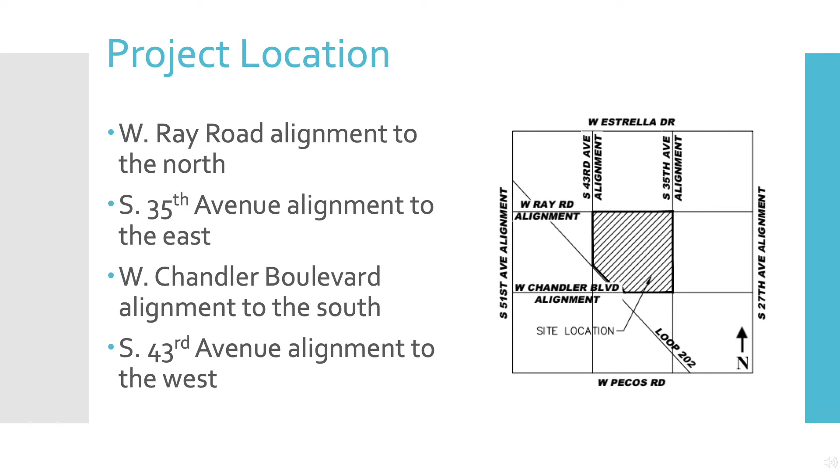This site has a current zoning of RE35, which is single-family residential, is part of the South Mountain Preserve, and has a natural drainage from the northeast to the southwest.

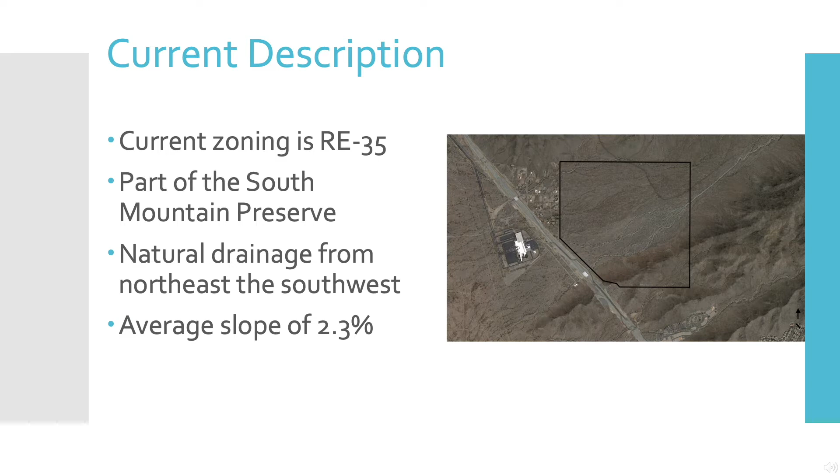Rise and Shine is proposing to include a police station on site, as the current one is 11 miles away. Additionally, the current fire station is 4.3 miles away. The nearest hospital is 4.5 miles away, the nearest elementary school is 4.3 miles away, and the nearest middle school is 8.8 miles away.

There are no high schools in the area, which is why Rise and Shine is proposing to include a high school in Parcel 1. The key feature for our site is the Rise and Shine Stadium that will seat 40,000 people and is located near the freeway for easy access.

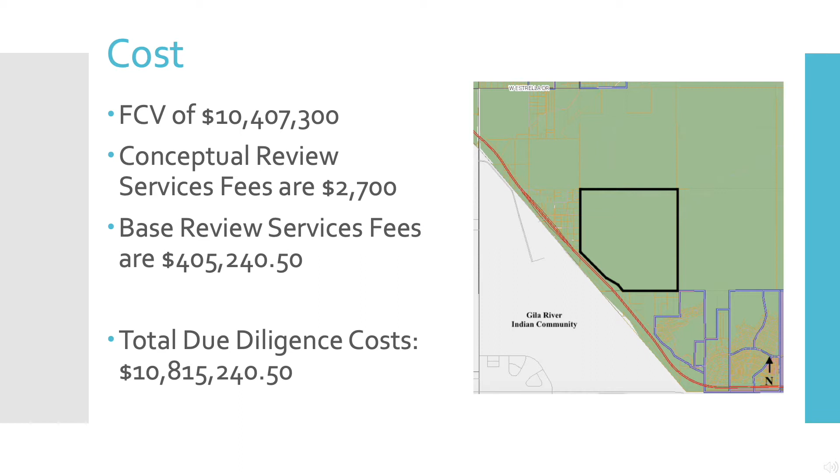This site will cost $10 million to purchase. It'll have conceptual review service fees of $2,700 and base review service fees of $405,000. The total due diligence cost will be almost $11 million.

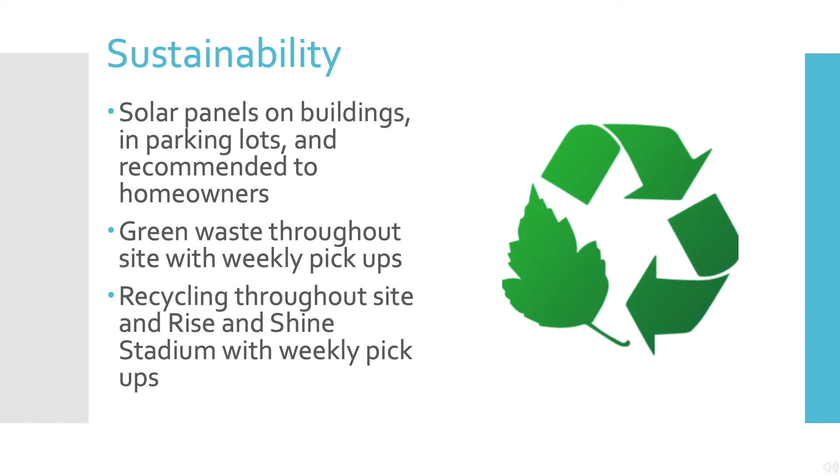We as Grand Engineering are recommending the use of solar panels, green waste, and recycling throughout the site wherever possible, and especially in the Rise and Shine Stadium. Rise and Shine will provide job opportunities, offer entertainment and shopping experiences, and be a place for residents to call home. It'll benefit communities through youth programs, community centers, community events, and funding of schools and emergency services.

To summarize the due diligence portion, the Rise and Shine community consists of 571 acres in the city of Phoenix, is surrounded by the South Mountain Preserve, has 9 different land uses with the Rise and Shine Stadium being the key feature, has a total cost of roughly $11 million, and will guarantee to offer a home, develop the economy, and maintain a safe community.

Hello everyone, my name is Andy Atondo and I will be presenting the traffic analysis done on the Rise and Shine site. The Rise and Shine site is 571 acres located off the South Mountain Freeway.

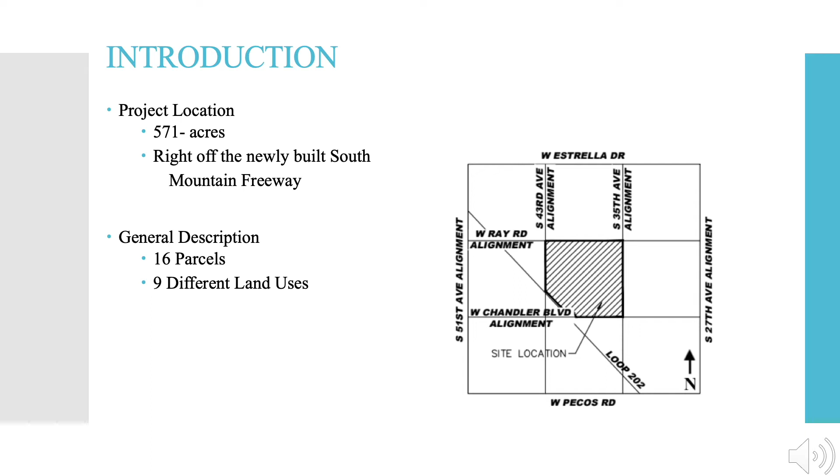There are 16 parcels with 9 different land uses. Currently, there is one exit that promotes access to the site, called the Vee Quiva Way. The land contains a road called San Juan Road and it does not have any classifications yet.

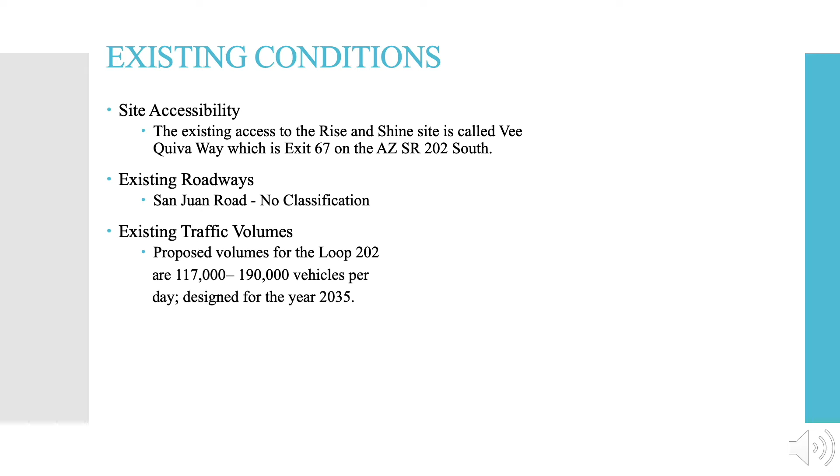The only traffic volumes available are the proposed volumes on the freeway for the year 2035. Here we have the proposed land use plan. On event days, the southwest corner will be highly congested due to the visitors of the Rise and Shine Stadium.

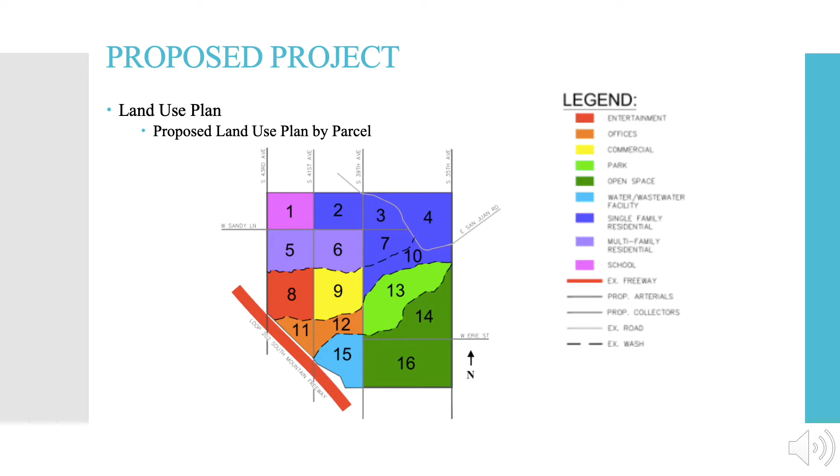The trip generation calculations were completed first. The rates came from the trip generation manual. The total amount of weekday trips generated were used for the next computations. The most trips generated came from parcels 9 and 12.

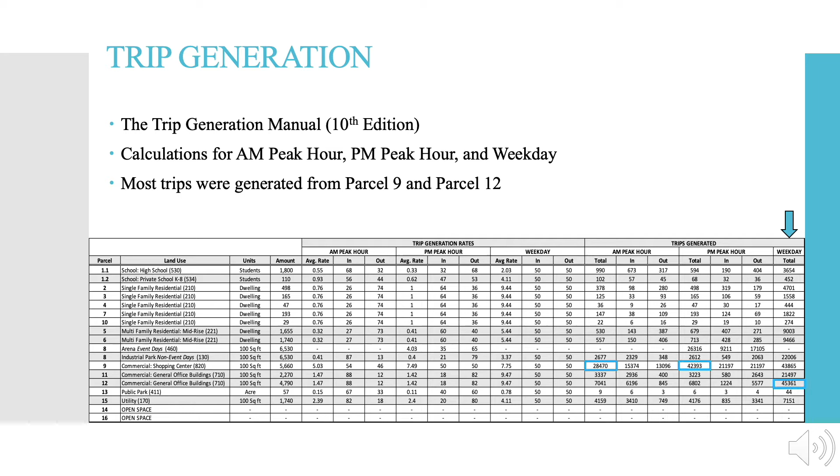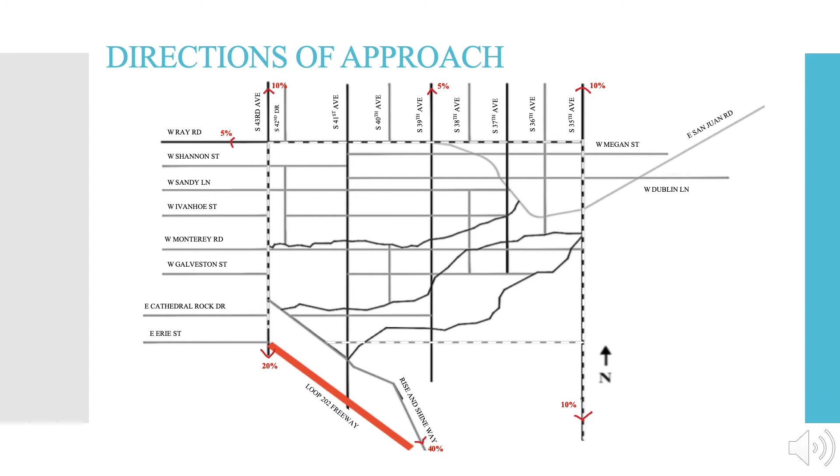Before starting the trip distribution and assignment calculations, the roads needed to be broken up into segments. A segment is a portion of a road. The names and colors to these segments match those that will be seen in the upcoming slide.

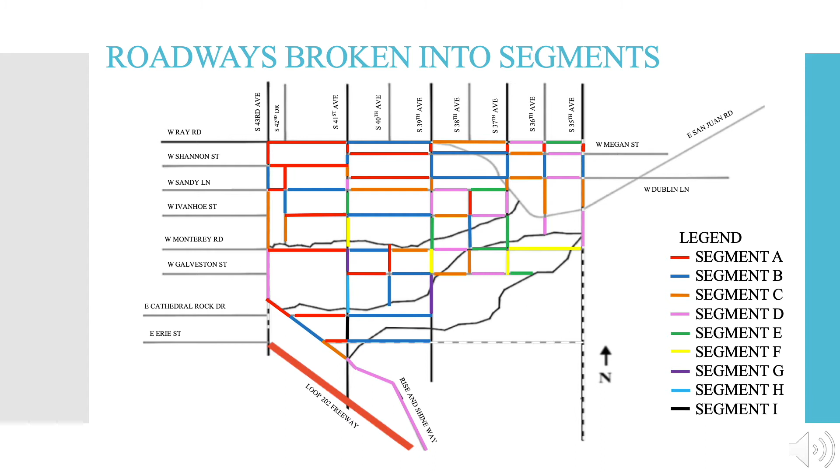After the segments were assigned, we began the trip distribution calculations. There was a percentage allocated to each segment that described how vehicles were predicted to travel through the parcels.

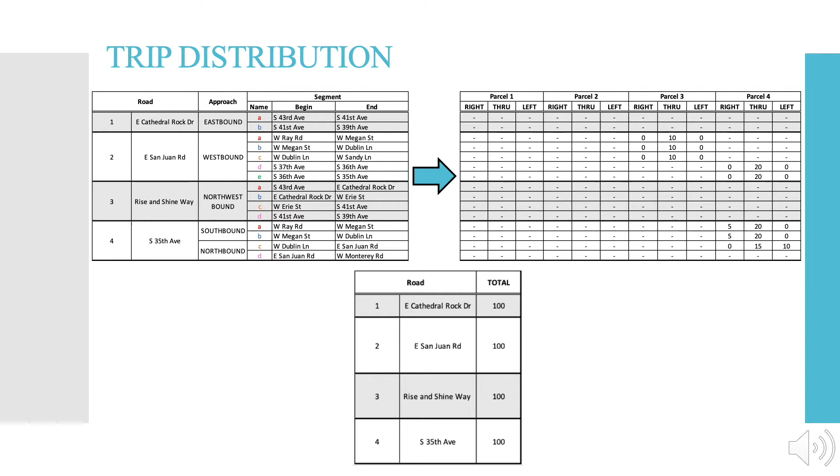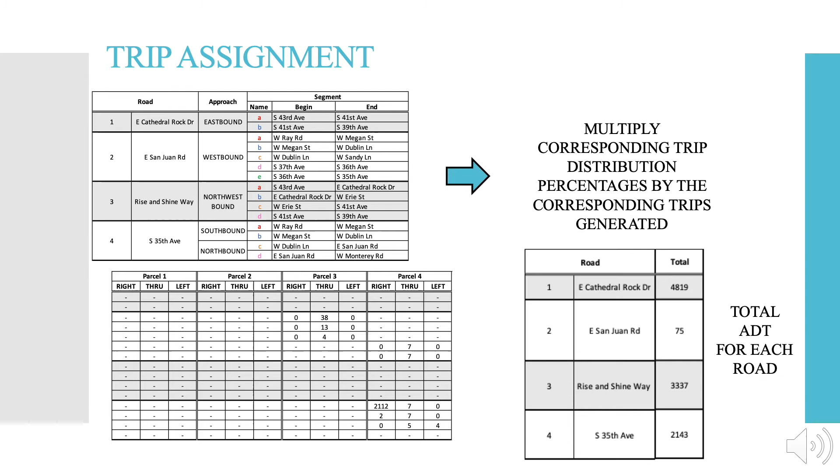Every total at the end of the road was equal to 100%. To get the correct number of trips assigned to each segment, we used the total trips generated and the percentages of the distribution. The total trips on one road was the average daily traffic used for that road.

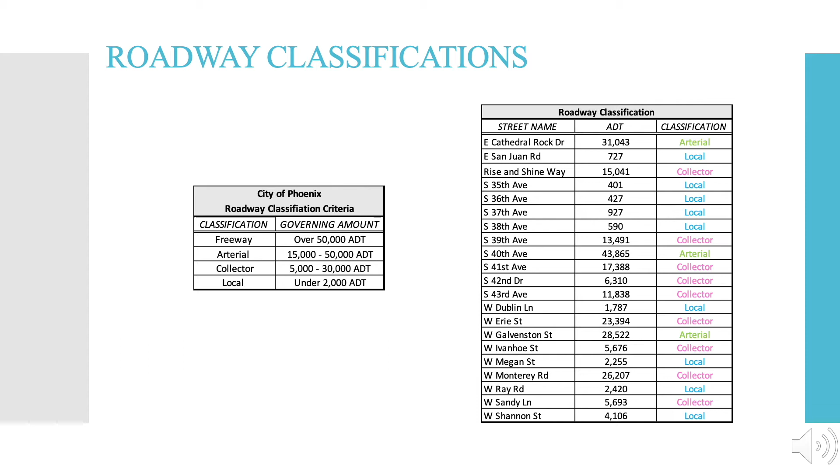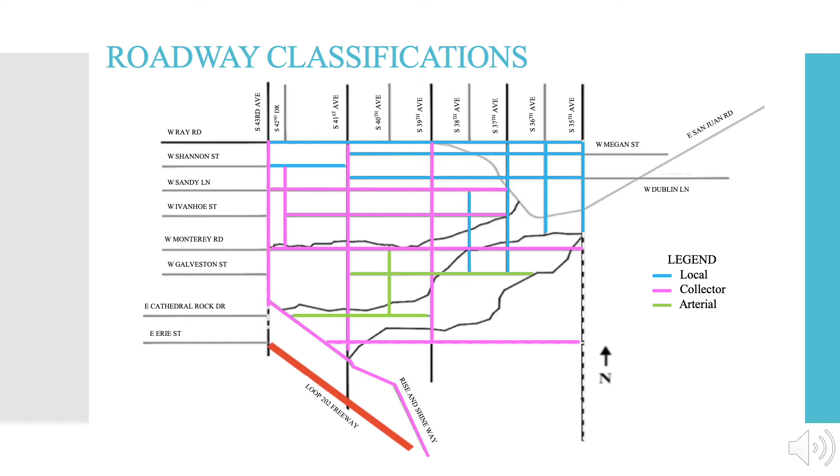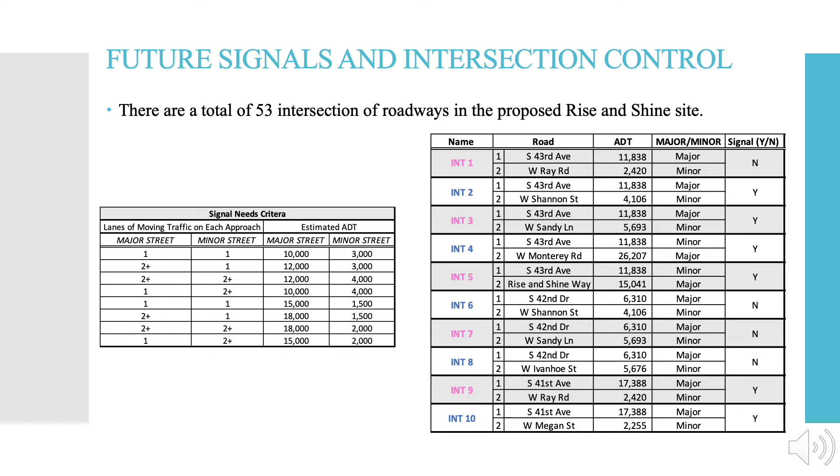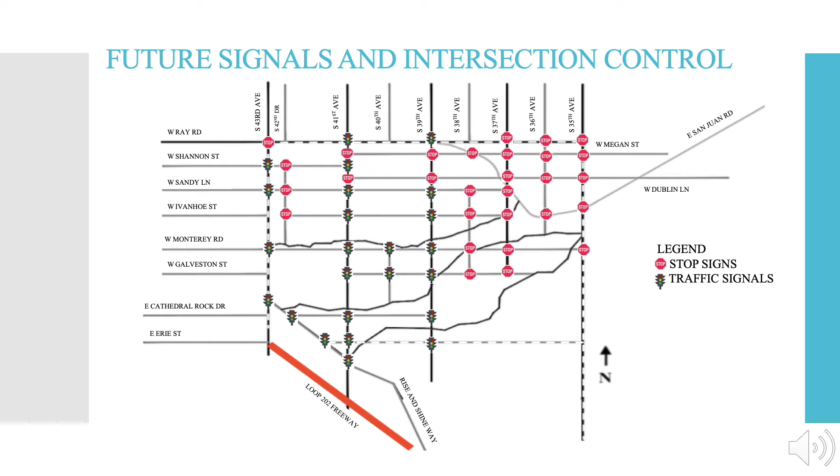There are a total of 53 intersections in the site. For each intersection, we needed to determine if a traffic signal was needed there. To do that, we used the signal needs criteria table presented here. Here's an image showing all the traffic signals needed for our intersections. Every intersection that did not need a traffic signal was issued a stop sign.

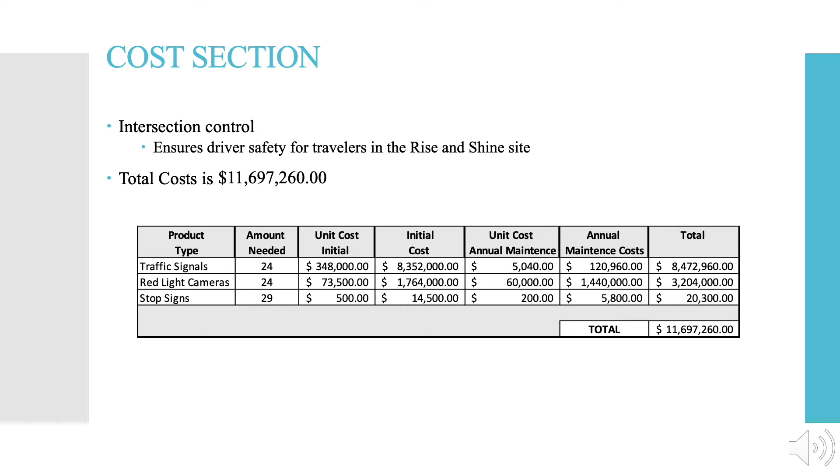The cost section for the traffic analysis included traffic signals, red light cameras, and stop signs. The total cost was $11,697,260. This cost included the initial implementation and annual maintenance of each system.

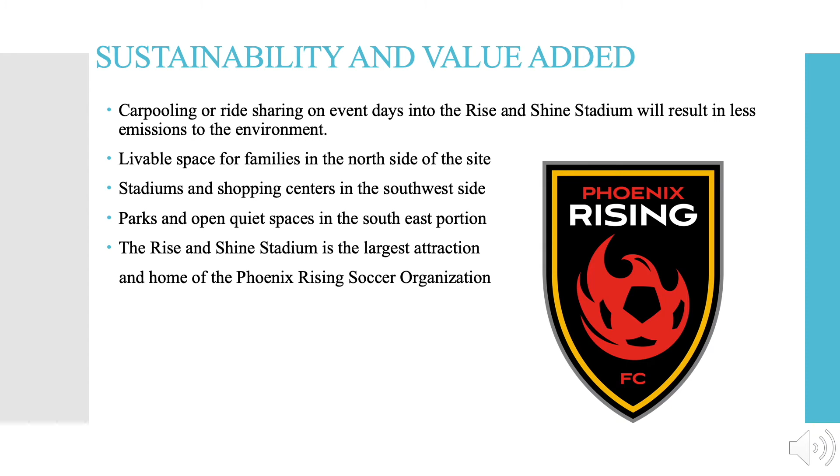Enforcement of carpooling and ride-sharing will create a sustainable environment. The range of areas to relax and hang out will draw visitors to the site. Being the home of the Phoenix Rising Football Club will be the most desirable feature.

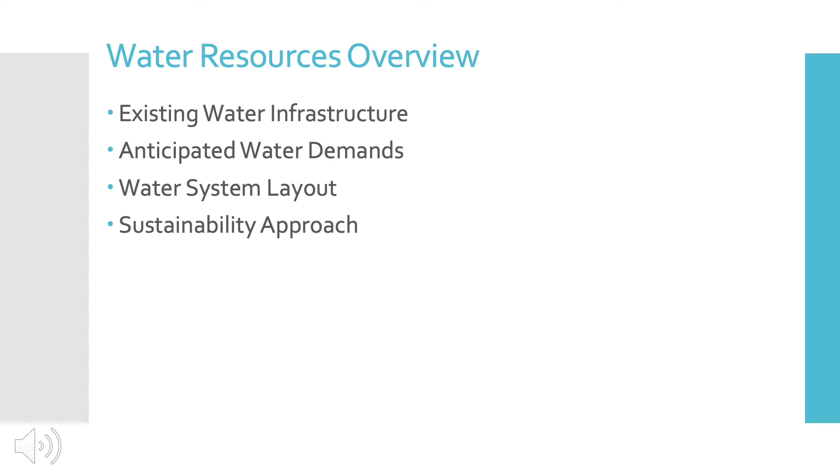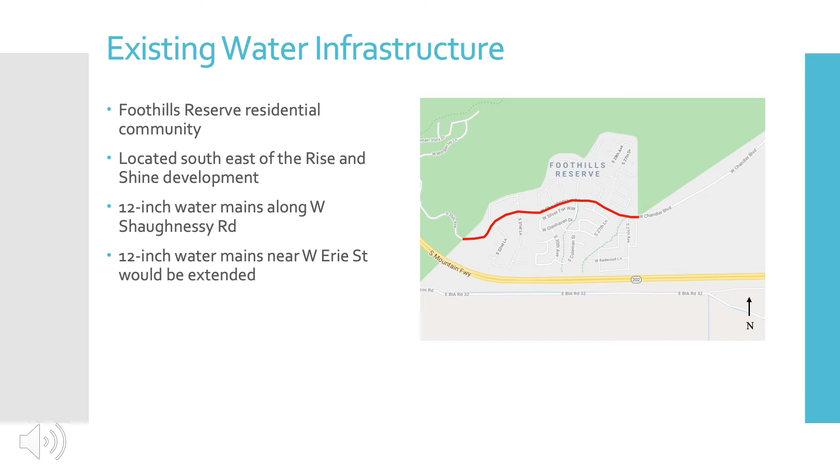The Rise and Shine development is located in an area where it is not accessible to existing water infrastructure. The closest existing water infrastructure is in the Foothills Reserve residential community, located southeast of the Rise and Shine development. There are 12-inch water mains along West Shaughnessy Road.

To connect to existing water infrastructure, 12-inch water mains near West Erie Street would be extended. Due to the site location and expenses, a self-sustaining water system was determined to be the most efficient method.

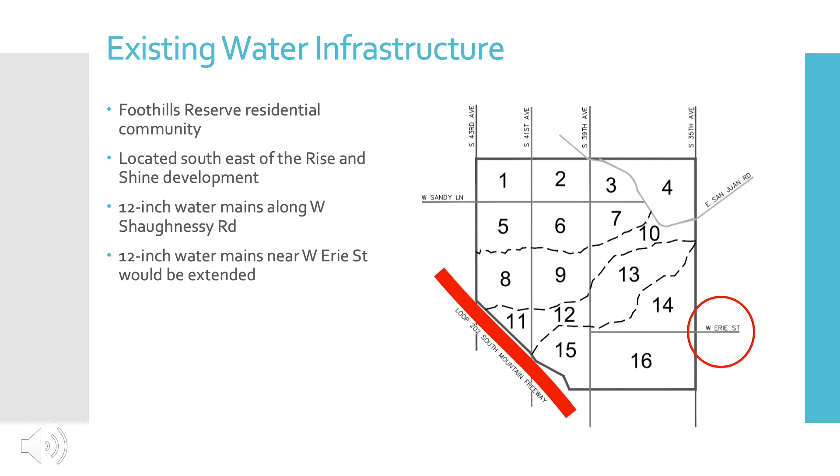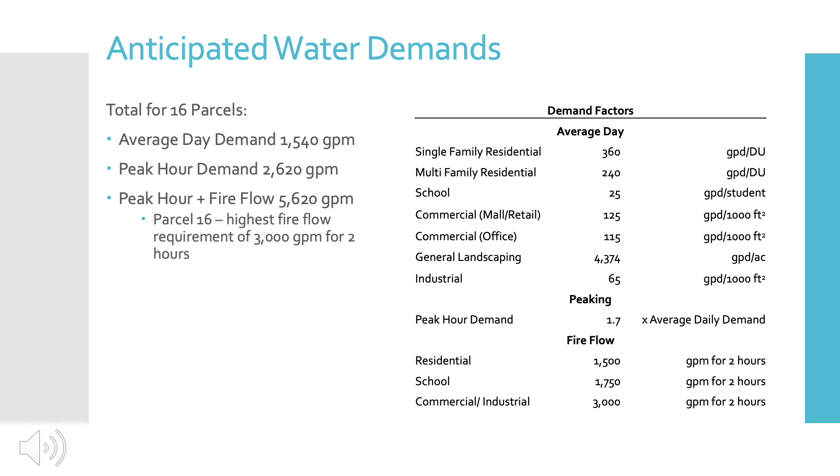Parcel 16 was determined to have the highest fire flow factor of 3,000 gallons per minute for 2 hours. The overall self-sustaining water system consisted of 3 wells, 1 tank, 40 8-inch water mains, and 31 12-inch water mains.

For modeling purposes, the tank and elevations were not included. 12-inch water mains are located near grid arterials, and 8-inch water mains are located near mid-section line streets. The water system layout totaled $5.2 million.

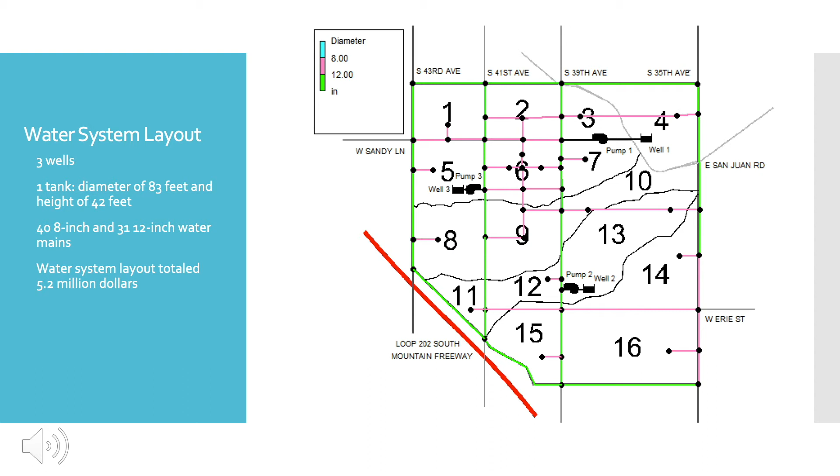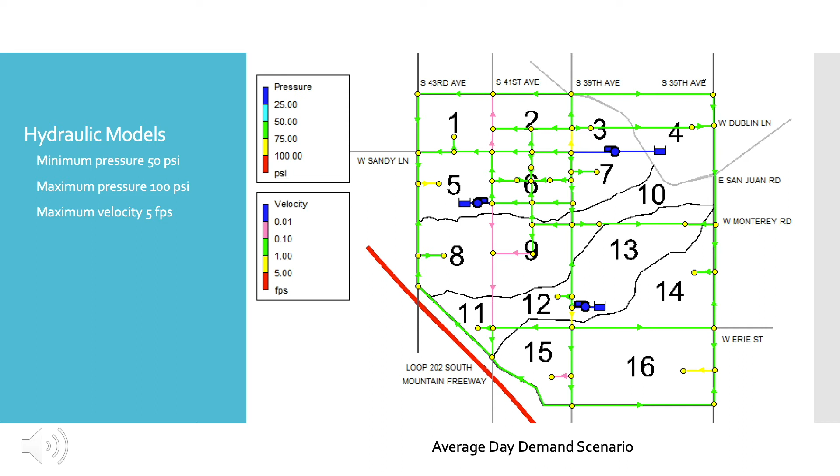Analyzing the average day demand, the peak hour demand, and the fire flow scenarios, the hydraulic model shows that the Rise and Shine development can be adequately served by the proposed system of 8-inch and 12-inch ductile iron pipe water mains. For the sustainability approach, the water discipline wanted to include the community.

The residential units will be required to meet LEED V4.1, requirements set by the U.S. Green Building Council. An example is that homes will be WaterSense labeled, done during the design and installment process. Implementing these design factors will help reduce the amount of water used.

To keep the community informed, summary reports will be generated. The reports will update the community about their water usage. The summaries will include groundwater level reports and tips on how water usage can be minimized throughout the community.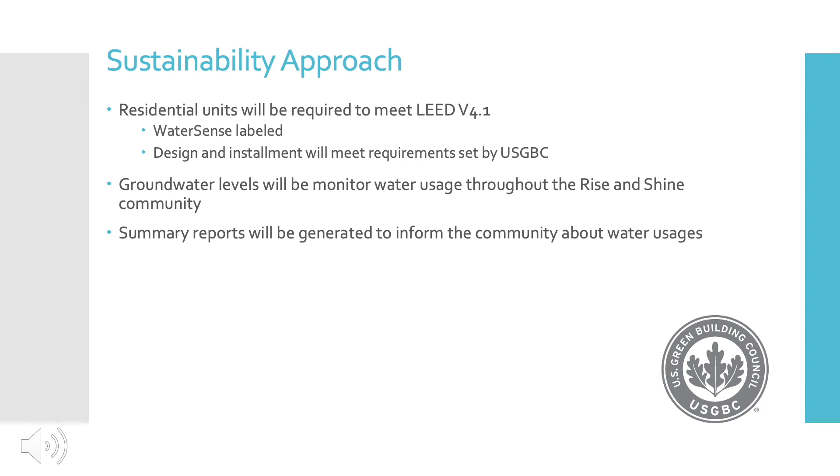For this project, I'm part of a grant engineering team and responsible for designing a new pedestrian bridge that crosses over the wash. In order to calculate the required dimensions of the bridge components, the following design codes were used, as shown on screen here.

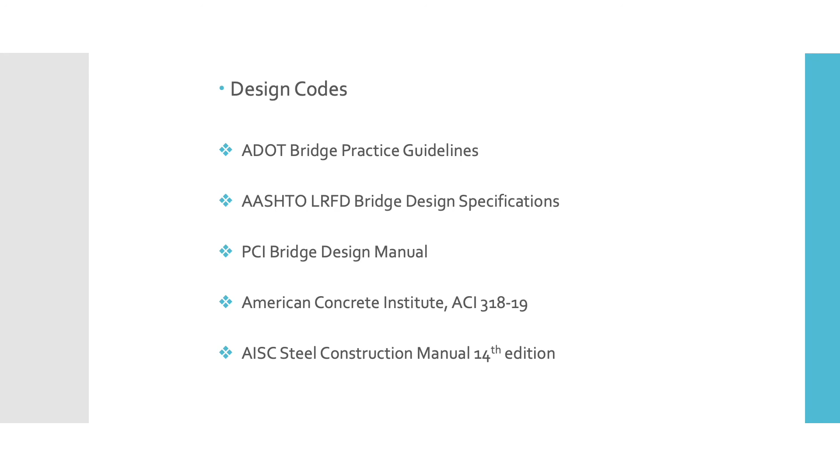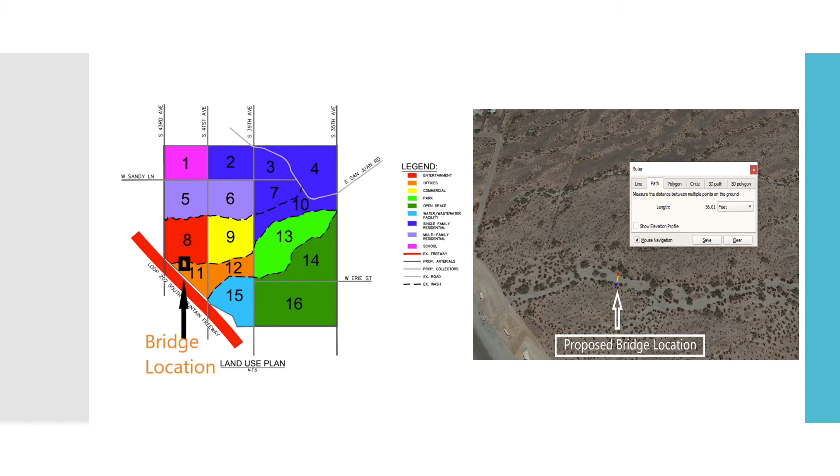On this slide, the left figure shows the location of the bridge, located over the wash between parcel 8 and 11 of the property. On the right, the figures show the length of the wash as measured on Google Maps, which is 36 feet. This is the first alternative design of the project.

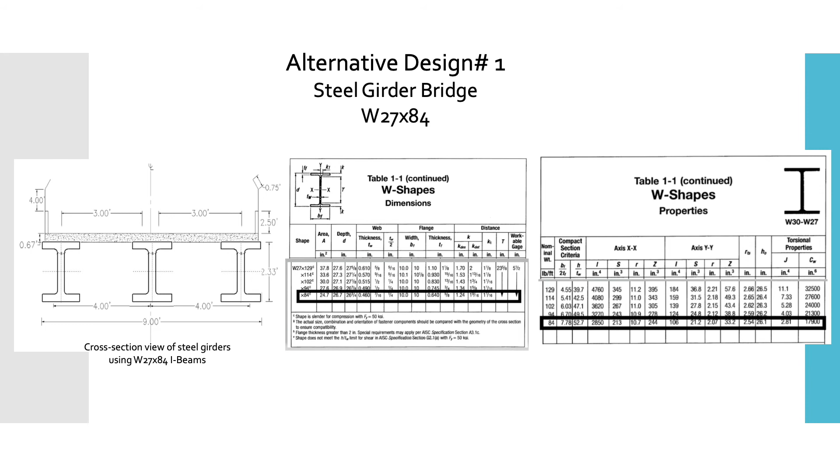The first alternative design uses 3 components of W27 by 84 steel girder. As you can see on the slide, the cross-section view, dimensions, and property information can be found here.

The second and last alternative design of this project uses three components of Type I AASHTO I-beam concrete girder. The cross-section view, profile view, and plan view of the roadway are shown here.

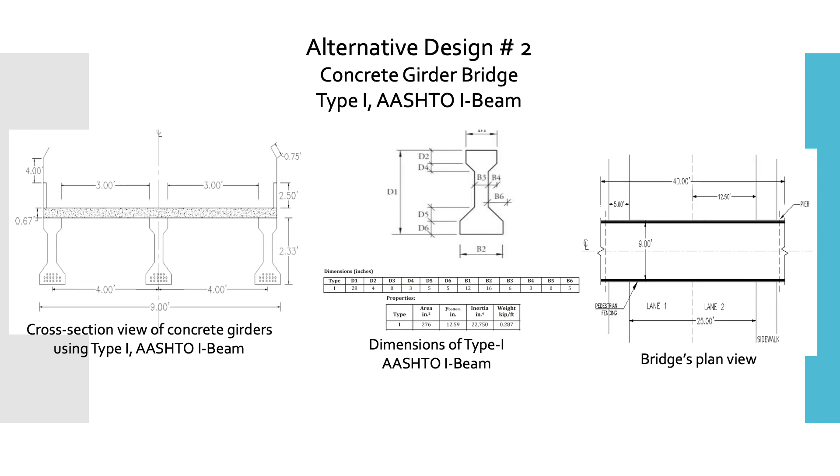For the design loads, the live loads and wind loads of the bridge component values were given in the AASHTO LRFD bridge design book, and only the self-weight of the deck needed to be calculated as shown in the table on the left. We then got the shear and moment diagram according to the loads information, and the maximum moment was found to be 785 kip-feet.

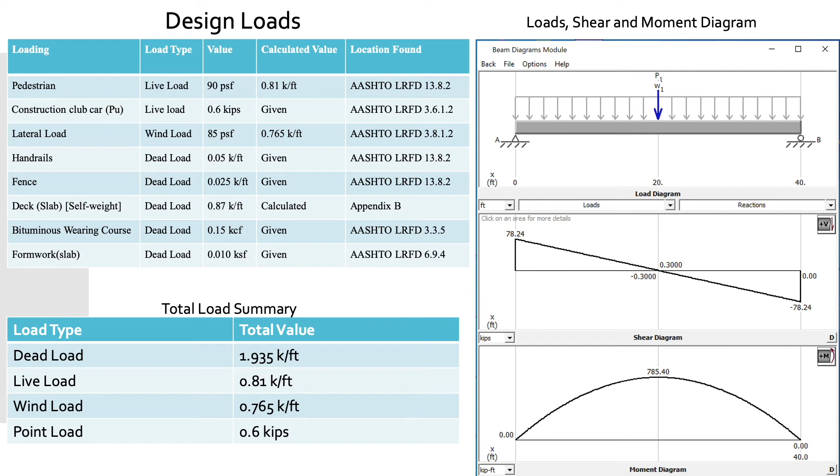I used AutoCAD software to design this bridge, and the dimensions can be found on the screen here.

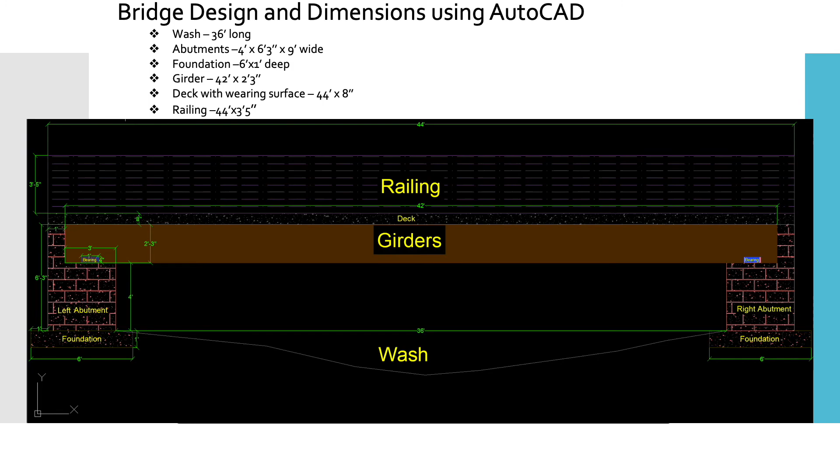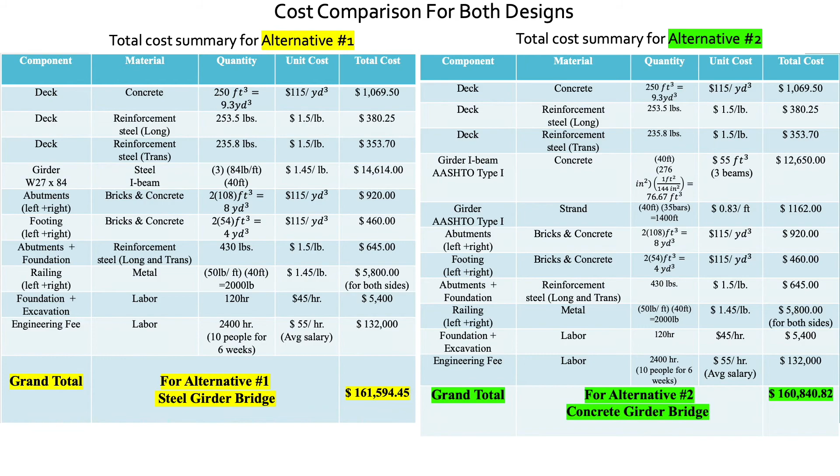This slide represents the total cost for both alternatives. The first alternative, a steel girder bridge, costs $161,594, and the second alternative, a concrete girder bridge, costs $160,840. After analyzing both designs, the steel girder bridge was found to be the best choice for the client than the concrete girder bridge, because steel is a more environmentally friendly material than concrete.

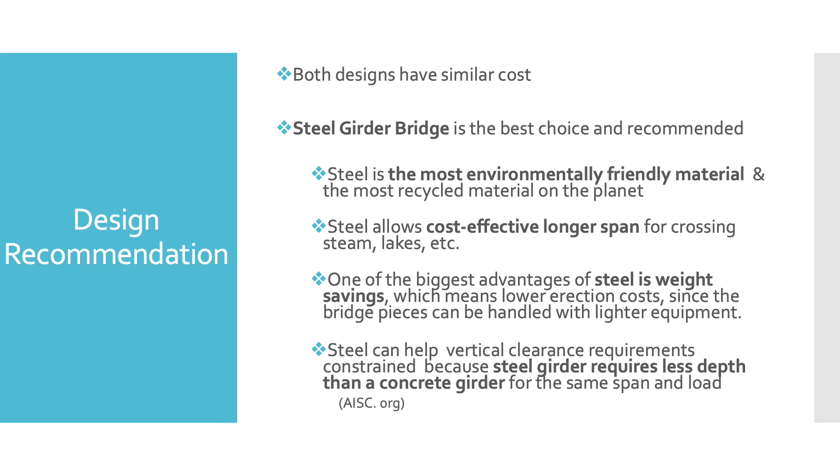I believe this pedestrian bridge project will add value to the property because it will bring a safer, easier, and reduced traveling time experience to the client.

For sustainability purposes, we will use solar power panels for the lighting on the bridge, and steel material rather than concrete. Thanks for watching my presentation. Have a nice day.

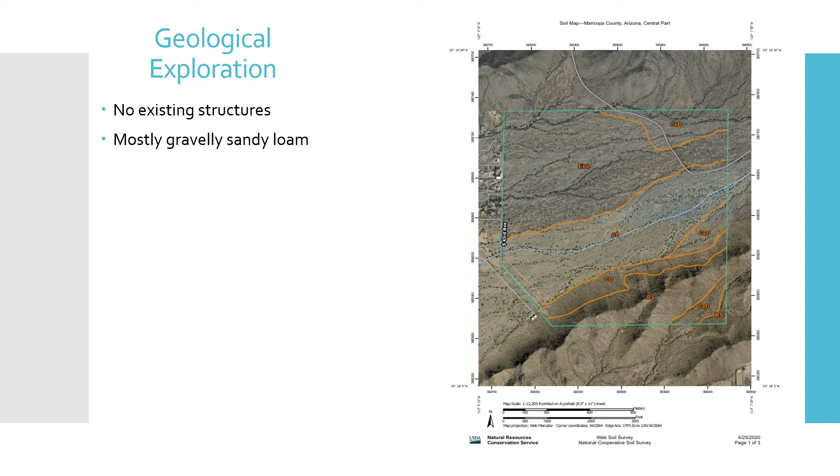During field explorations, there were no existing structures on the development, meaning there will not be an opportunity to retrofit existing foundations. The site is mostly composed of a gravelly surface and a clayey, sandy subsurface.

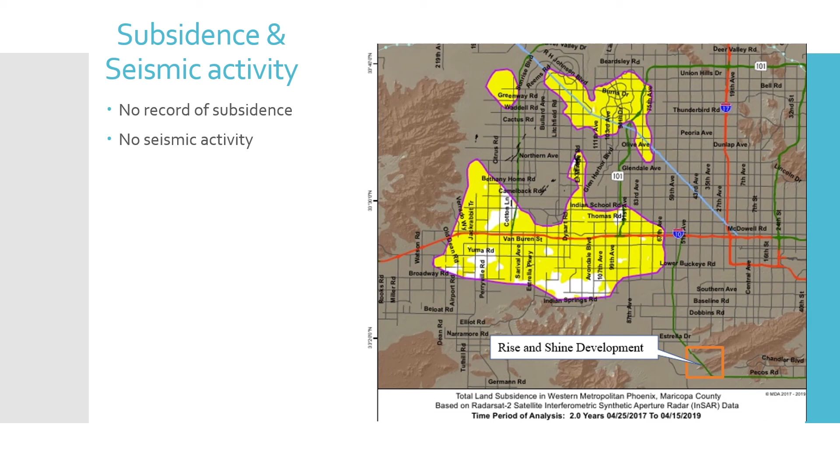According to the U.S. Geological Survey, Phoenix is not in an earthquake hazardous area.

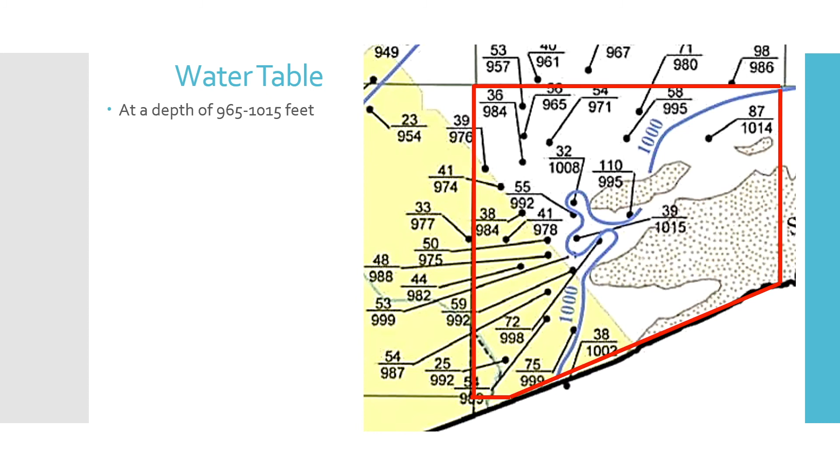Using data retrieved from the Arizona Department of Water Resources, the water table is at a depth of 965 to 1,015 feet, indicating that it does not need to be considered in design calculations.

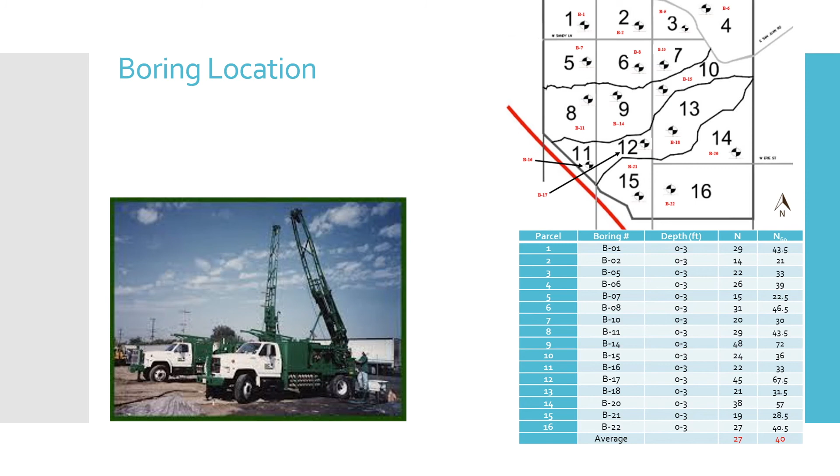The location of each boring is shown on the map. Soils were obtained using a CME 75 drill rig with a hollow stem auger. Using the SPT method, the average blow count N value is 27, and the adjusted blow count with 60% hammer efficiency is 40 at a depth of 3 feet.

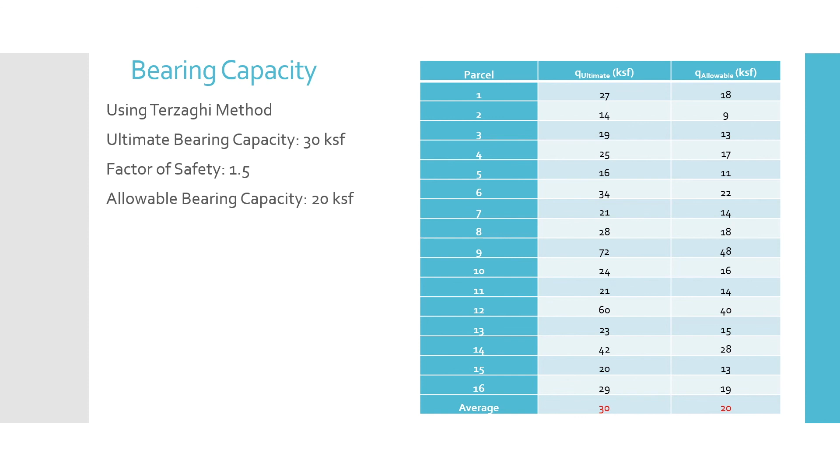Using previous data, it is recommended that lightly loaded structures like residential homes use slab on grade, while multifamily and commercial buildings shall use spread footings. Heavy structures like stadiums or schools shall use pile foundations. The recommended foundation for each land use is listed in the table.

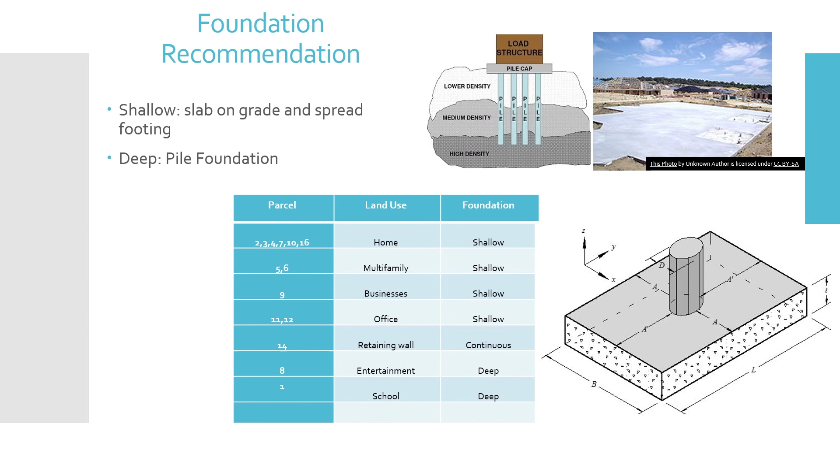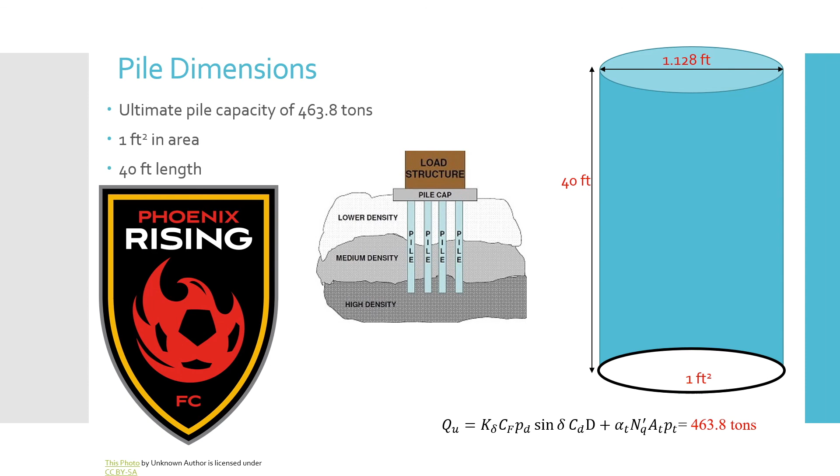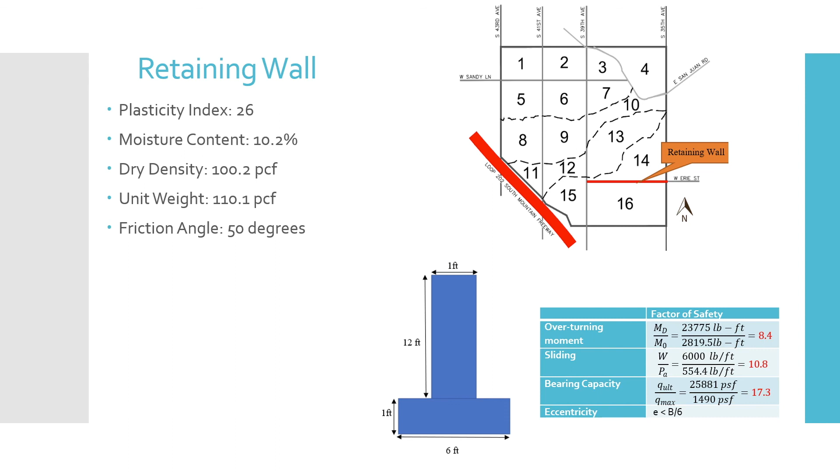The retaining wall placed on Parcel 14, shown on the map below, has been evaluated for 4 modes of stability by checking the factor of safety with respect to overturning moment, sliding, bearing capacity, and eccentricity, and it meets all requirements.

To promote sustainability, piezoelectric devices can be placed under roads, preferably asphalt pavements, to capture mostly kinetic energy from vehicles and thermal energy, and convert it to electrical energy. This can be a direct source of power for city infrastructure, reducing the use of external power sources, with savings reflected in monthly maintenance costs.

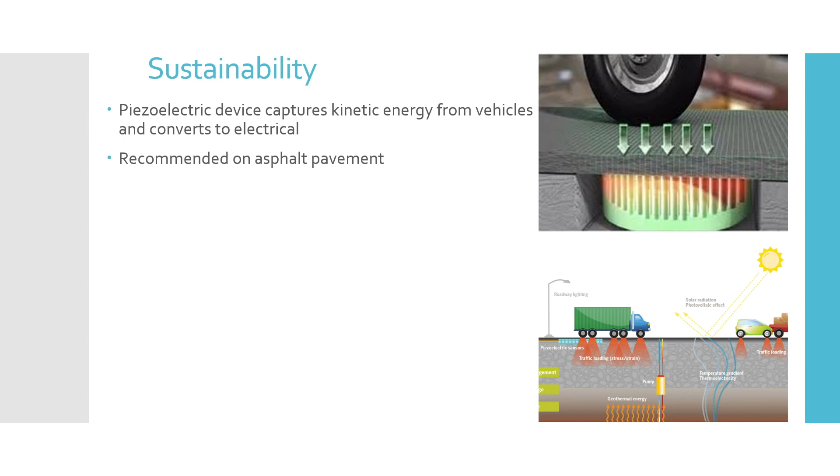Finding the volume and quantity of each foundation using a unit price of concrete of $90 per cubic yard, the estimated cost comes close to $2 million.

To summarize, I discussed that there are no existing structures, the site is mostly a gravelly surface and a clayey, sandy subsurface, there is a deep water table, no subsidence or seismic activity. Recommended foundations and the retaining wall were discussed, and the estimated cost is $2 million for the Phoenix Rising proposed development.